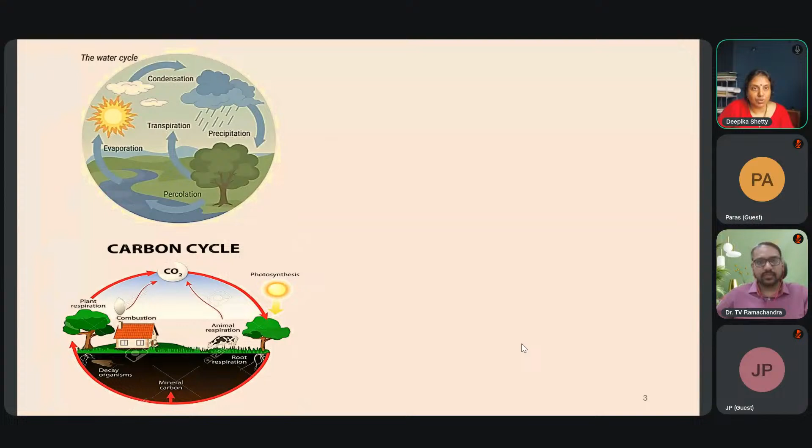Now, I think in built environment especially, these two nutrient cycles are very crucial, or we make a difference both in water cycle and carbon cycle. If we look at the issues we are facing in our urban or developed areas, it is the water management as well as the urban heat island effect. And these two cycles are the key for this cause or this effect.

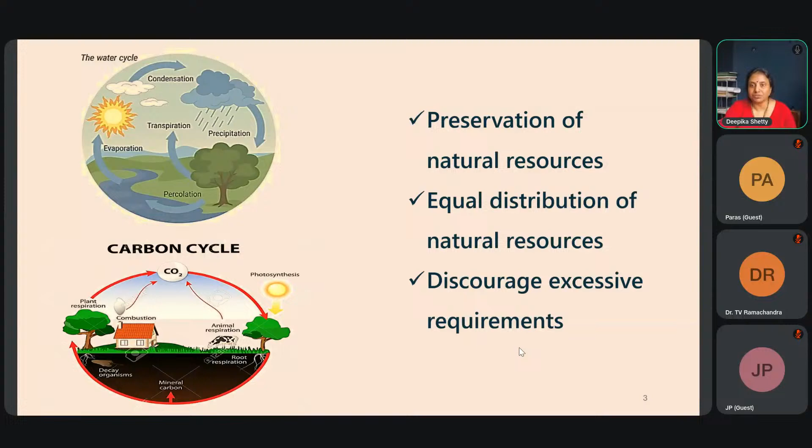So if we can be very conscious about these two cycles, I would say in built environment, the amount of green and water bodies in our design, as well as the percolation that we allow and how we manage the wastewater - these are key for the water cycle. In terms of carbon footprint, eco-friendly resources, as well as maintaining the green cover and radiated energy for the built environment. Equity in distribution is another issue - where do we contribute towards society and how much are we being greedy about managing the resources. So these are our design goals in terms of resource management.

So now whenever we say development, we should ask the question, what is it replacing? Normally the natural environment is being replaced. And then we ask what form would be best to replace the natural environment. Can we bring a system of development which is as close as possible to the natural ecosystem? May not be same, but at least similar. So understanding the existing natural system and bringing the designed or artificial form of habitat as close to it would be the second goal.

And the third goal is the impact. Now, when we make changes, there is an impact on the environment. How much can we replenish the impact of that development? These are the questions we should ask whenever we design.

Second is, whenever we design, where is the raw material coming from? How do we ensure food security? How do we ensure water security? And how do we ensure energy? Because for any habitat, the basic needs of man are food, water, and energy. If these three are not satisfied, we cannot call it a sustainable human habitat. So we should be building systems in the design which will manage these three well. And finally, that is for resource management.

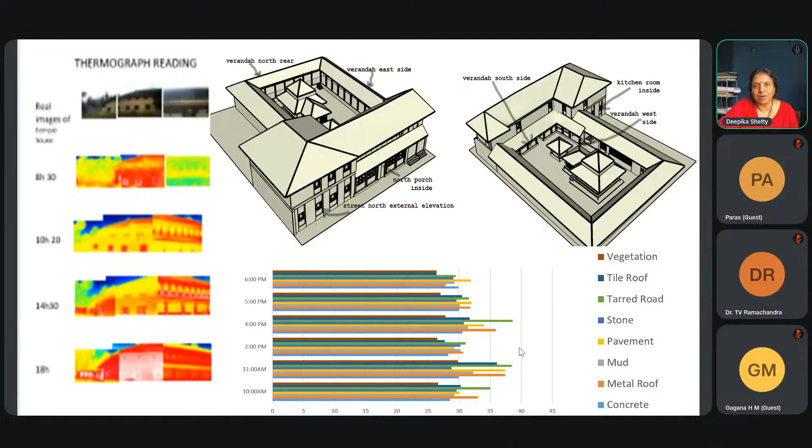Being in a tropical climate, this is very crucial for comfort and consumption of heat for comfort. And of course, there are other studies we did for wind circulation and all that, which I will get into later.

From these lessons, if I have to put some rules of building design, which I did with my second year BArch students, we do first profiling of the user and their patterns of use. In the patterns of use, we convert it into area requirements. Here the thumb rule is, if the activity can be done in an open space, we should allot that activity in the open space. Don't build when that activity can be done in open space.

For example, a basketball court can be in open space or enclosed. So if you are environment friendly, keep it in open space. A lot of congregation, community and recreational activities of meeting, even coffee or small time leisure activities, sitting and chatting can be in open space rather than built space. Instead of a cafe, coffee day shop for leisure, I would say make it a coffee shop along the open space and create that comfort which we need for those community activities.

So the first thumb rule is convert the requirement of activity as much as possible to open space. In a place like Manipal, where the heat and rain is very high, the semi-open space, that is only with columnar space and roof, would be the ideal space for habitat. In terms of creating comfort, the courtyard typology, the veranda typology, after open space, would be the space.

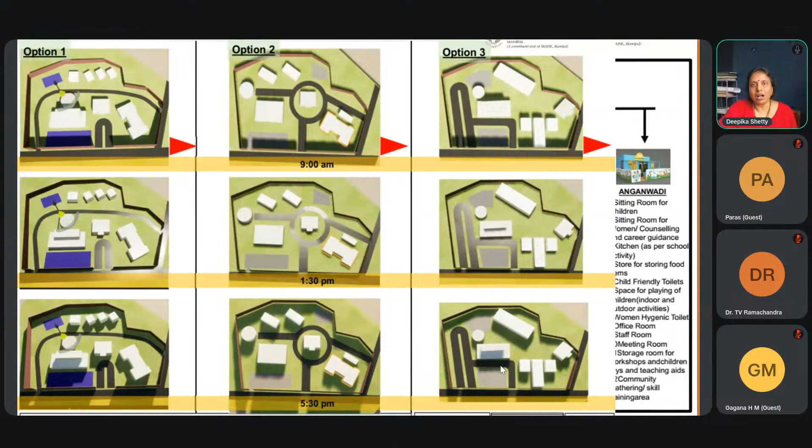Similarly, we stacked the buildings in such a way that we used minimum area of the site for built environment. We used the building footprint, or ground coverage for building, as less as possible, and rest of the area we left for natural systems like water management, waste management, and rainwater harvesting. Out of the options, we selected the one which is most efficient.

So if you see here, the amount of paved area was kept to just one round and not going all over the site. Similarly, the parking or the vehicular traffic was cut off in the beginning itself, so that the rest does not have too much paved area for parking and such things.

Similarly, the orientation of buildings and the open spaces were distributed in such a way that all these in-between spaces were usable spaces, including the courtyard and the shaded area for large-scale gathering. The Anganwadi play area again is open space with a secure environment.

The semi-open, open-air theater was in a place where the building gave shade in morning and evening hours. The courtyard allows the people to have recreational activity in the office with security and comfort even in afternoon time, so they can have their break time or lunch time over there.

So we created the cafeteria as a colonnaded open space as much as possible. The building is not enclosed, which allows it to have maximum ventilation.

And we created an area for the management of water and rainwater in such a way that the whole year's requirement of potable drinking water is managed with either rainwater during rainy season or stored rainwater during the off-rainy season. We had the recharge well, where excess water goes into groundwater recharge, which keeps our water security for the whole area.

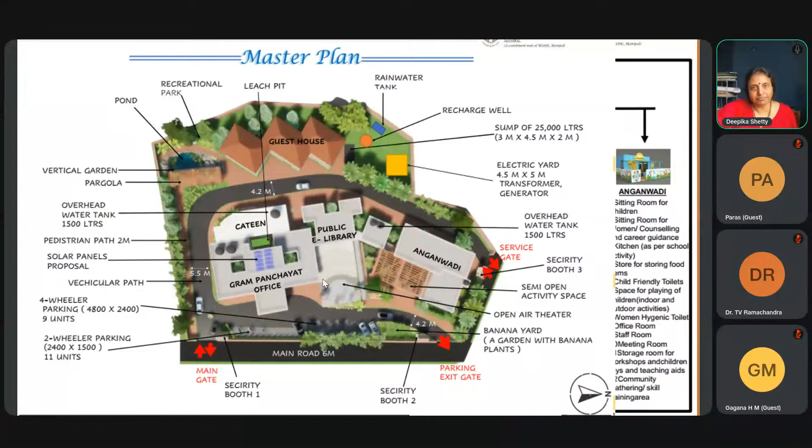Now, after this, we made sure that all the built material was such that it would reduce the carbon footprint, both from the type of sourcing it, so that it is locally sourced, as well as the ecological footprint. It is as less processed or artificial as possible.

The third criteria was to see that the radiated heat is less, so it allows percolation of water, like paved material or open pavers, or porous material which allows water percolation, as well as the energy footprint is very low in terms of radiated heat and transmitted heat. In walls we call it U value, and for paved areas we look at the porosity. All this was taken care of when we selected material for the built environment.

Just to give you an idea, after all these measures, when we look at a typical office building in an urban area, the energy per unit area per day comes to almost 2,500 to 4,500 kilocalories, depending on the type of equipment. A good efficient building today, what we call a green building, uses up to 1,500, or 500 to 1,000 kilocalories per square meter per day.

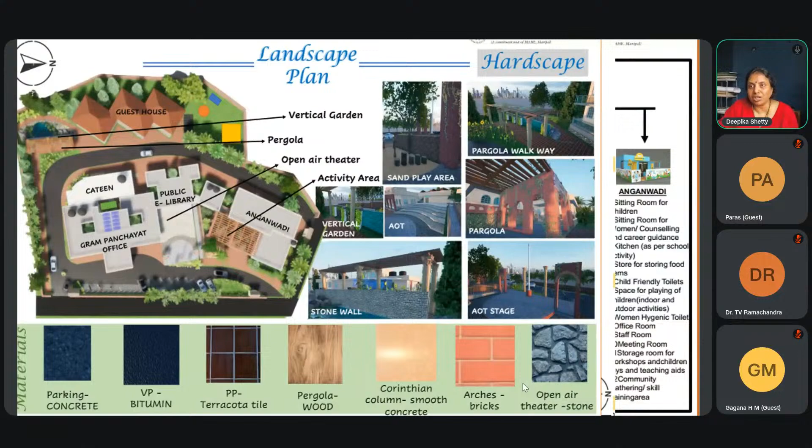However, when we look at this kind of design, where the amount of building coverage itself is reduced, we are bringing it down to 100 kilocalories per square meter per day. So the saving is exponential, which we don't even realize when we do these measures in the built environment.

Similarly, every material is sandwiched with some air gap, both in the roof where maximum radiation takes place, and we use material which will reflect heat rather than absorb heat. So each gesture of this kind can reduce the temperature inside by up to 10 degrees centigrade.

Also, the reflected heat, like glass and metal, reflects heat. So the area of glass and exposure to reflective materials like metal is reduced to a large extent, so that the surrounding environment and open space also don't get heated. So all these systems were used, along with clay tiles. The aesthetic can be as modern, the equipment can be as modern, but these systems really make a difference in your energy consumption for comfort in the indoor environment, as well as comfort in the outdoor environment.

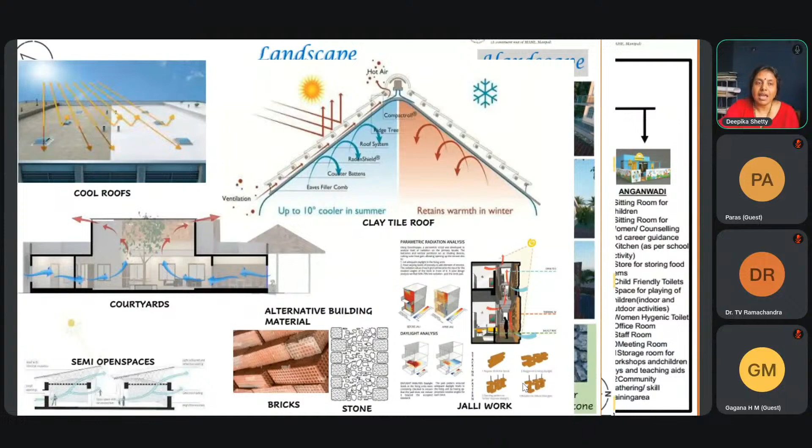So after all this, we go into the role of water bodies, how important it is to have water bodies in your building area or the built environment. They perform so many basic roles for us in a habitat, and this is not naturally occurring, it should be man-made. I would say every cluster of housing, every institution, every big township development should take care of one or more water bodies. They help in microclimate moderation, groundwater recharge, flood prevention, stormwater control, ecosystem services in terms of natural ecosystems, and irrigation and recreational activities.

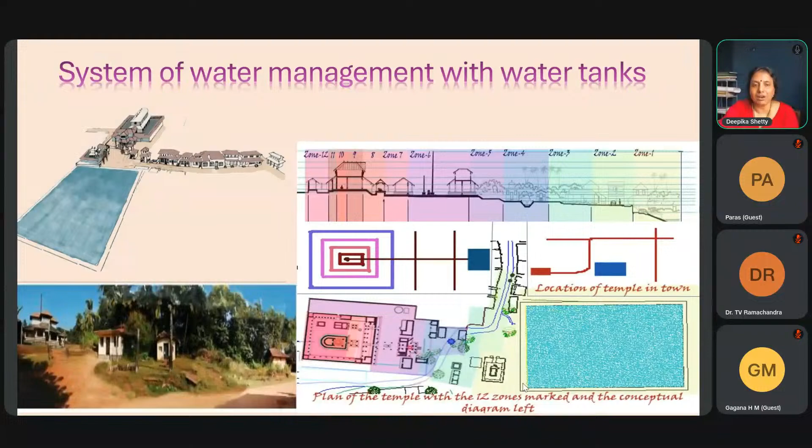So when we look at our traditional systems, like in Barkur, every neighborhood of 50 to 100 houses would have one tank in the lowermost position linked to a temple, which maintains its cleanliness. The area of the temple is much smaller than the area of the tank, and the tank is lined with stone so it maintains its boundary and people don't encroach on it. At the same time, it is highly vegetated - stone open pavers allow the soil to be used by plants and vegetation. This is not used for any human activity like bathing or washing, because every house and property has a well. So this tank acts as a recharge pit for groundwater, and consumption is through the well. This was a very good system which can be used even in modern times.

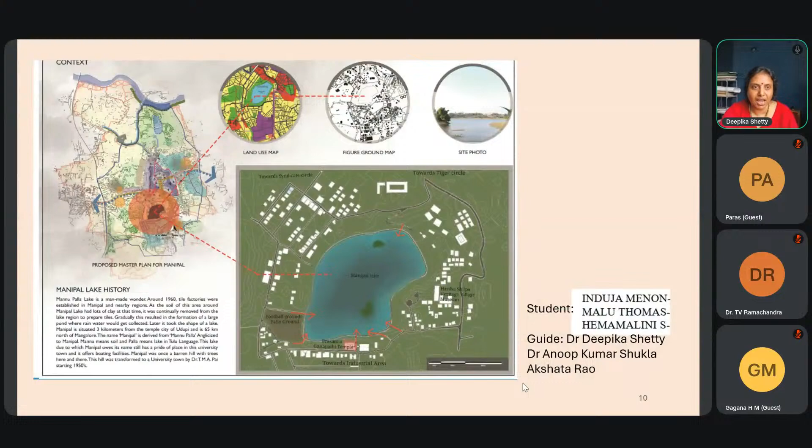The case we took here is of Manipal Lake, where there was a quarry or clay extraction site for clay tiles, and that became a pit. It was scooped out again for management of water. It was in a low-lying area, and finally today it has managed groundwater recharge of more than 10 lakh liters, enough for a neighborhood of Manipal or high intensity development.

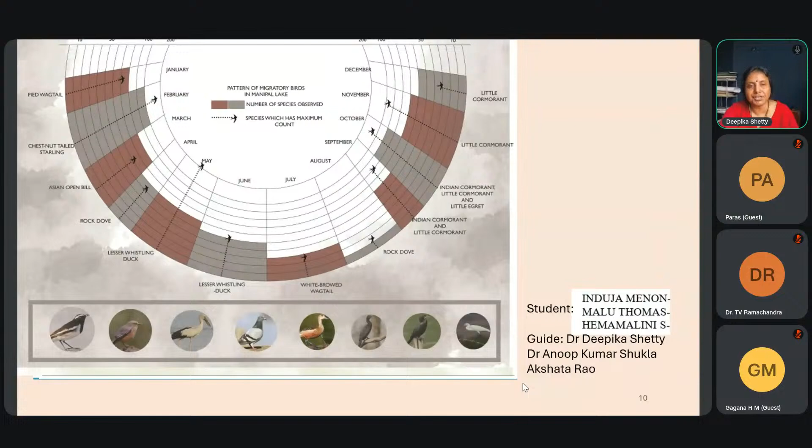It also supports more than 200 species of birds and a lot of biodiversity. So we mentioned that if we give 40 to 50% of the lake edge for natural habitat, we ensure that the habitat for birds and species in and around the lake is maintained, and the rest of the area is for human consumption such as walking and recreational activities, along with natural features, making sure the vegetation is of native type and manages the soil and stability of that environment. We identified the species which would be beneficial around the lake, and the activities which could be designed along with the greenery, making sure that 40 to 50% of the lake was not disturbed by human activity and was left for nature. In fact, the rest of the human activity would watch nature and enjoy it.

So this kind of space is required in our human habitat or dense urban active areas, so that we still enjoy nature and create some place for animals and other species too.

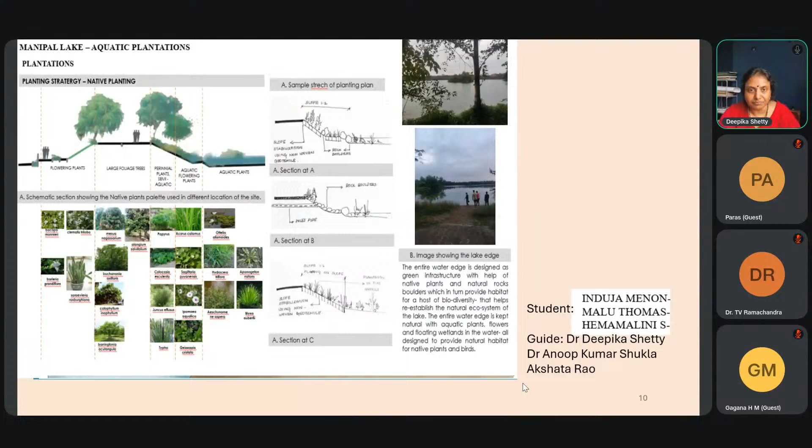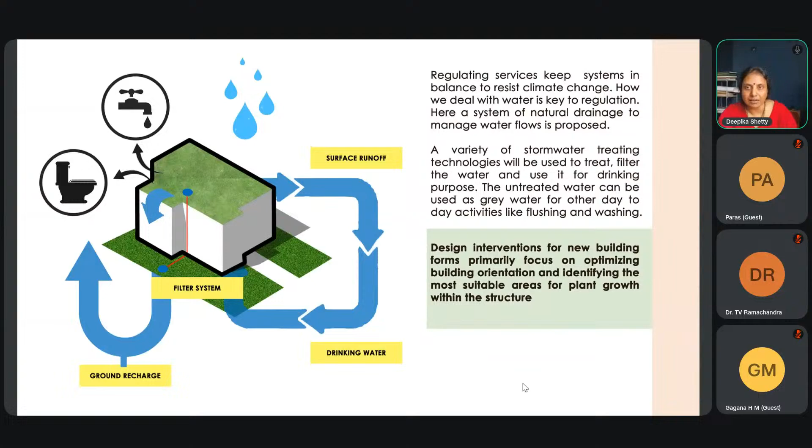So next, when we have an apartment block, can we increase the amount of greenery and manage surface runoff as much as possible, so that we have water security as well as reduce the heat island effect? The simple measures we take are using fittings which consume less water, and making sure that as much as possible the roof and surrounding area have green cover - the higher the amount of foliage, more height, more leaves, the better the cooling effect and ecological services. With this thumb rule, we looked at building forms which will allow even vertical surfaces to have greenery, no matter how high they go. We created typologies of forms which allow greenery, and looked at systems where it could be managed as common space, like near staircases and terraces, with maintenance handled as common maintenance rather than individual, since many people say they don't want to maintain greenery because they don't have the time or money to manage it.

As a society, as a group of individuals, we can always maintain open green spaces in a built area. So all our common spaces like staircases, terraces, and duct areas could have greenery and be maintained through common services, given drip irrigation and wastewater management through those services. So that was the second step.

Third step we did was, whatever area we could, we gave it for water and green space in the neighborhood. So after the cluster of buildings were designed as per the requirement, the roof and other surfaces and management of water was given for green area.

And there's this concept of mixed use. So near the habitat, we gave types of plants, smaller creepers, bushes which can be consumed, like vegetables, fruits, creepers, or micro herbs, so that people consume it and they will maintain it because it is giving them some value.

And away, at the larger scale, we gave more importance to larger trees and foliage, which will increase the ecological services and groundwater recharge. So we created a format where people will feel benefited from these measures, both in short-term and long-term basis.

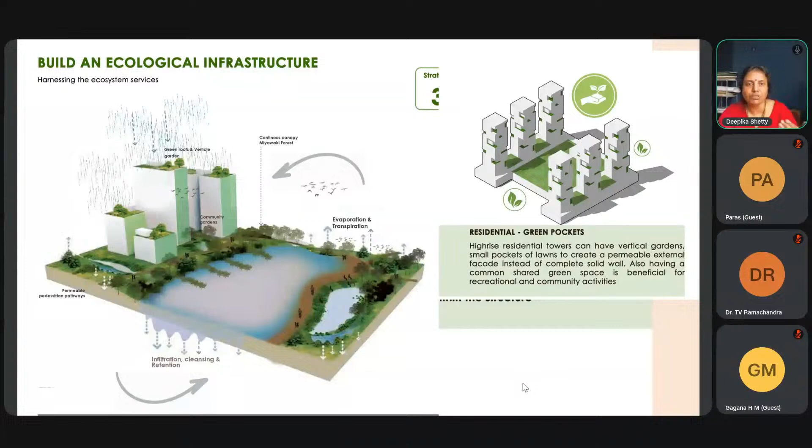And similarly, we had this mixed community farming in the public domain, like streets or common spaces, which would allow reducing the urban heat island effect, as well as increase food security and water management. So we said, can it be community farming combined with fruit trees and community vegetable growing?

And also create a habitat where we are used to using the open space for community, like children's play area, meeting area, interaction area, and group activity area. So this was another vision for a larger scale.

This would also mean that we get exposure to nature and create habitat within the built environment where other species are there, where we see butterflies, we see birds. Today we don't hear chirping of birds in all our built environment. Many places sound dead, they look dead, because there is no other species. So we create habitats and we become part of nature in these areas.

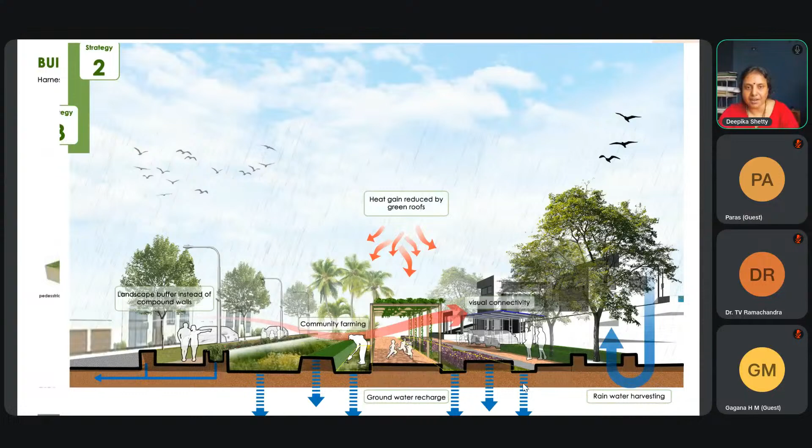Now, even if we look at our traditional scriptures, they have given a lot of importance to certain types of trees like banyan and other ficus trees like peepal. I went into the technical details and realized that these ficus trees have maximum ecological services. Again, thanks to Sir, that I learned these kinds of terms and concepts.

And we realized that within 5 years, the banyan can start giving its benefit. For 4 years you have to maintain it, see that it grows properly. And the propagation of it is through seed, but it's very difficult, preferably grafting, or if there is an existing peepal or banyan tree, I would say maintain it or protect it, because natural propagation has almost stopped due to man-made problems.

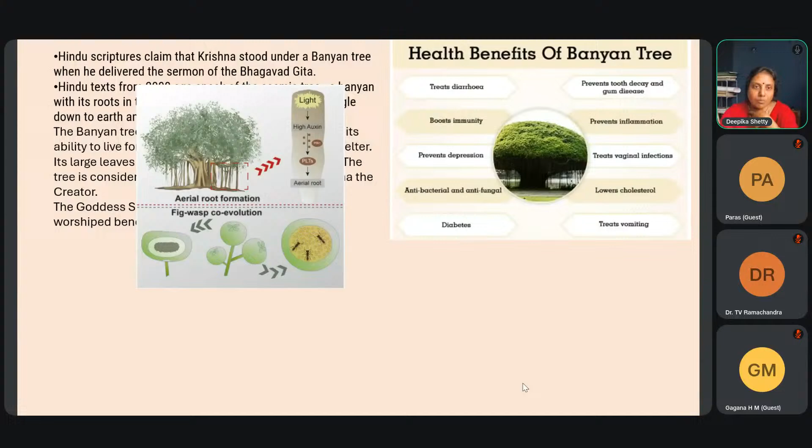The wasp, which was required to pollinate it, is almost extinct. So natural propagation of banyan is almost stopped, and the survival rate in the human habitat for banyan is very low, because we have not given enough space for banyan to grow.

However, one of the things we can do is grafting. Even when a banyan tree is removed, we can create another space for it and see that it is preserved, because per square meter of foliage, it gives maximum benefits to us in terms of medicinal values,

reducing the urban heat island effect, disaster management in terms of preventing landslides, soil erosion, and improved water percolation, reduction of runoff, reduction of flood, reduction even in terms of cyclone - if a tsunami or cyclone lashes against a banyan tree, the force is reduced and hence the built environment is protected. So these are kind of shields you can create in your human habitat against disaster, as well as providing ecological services.

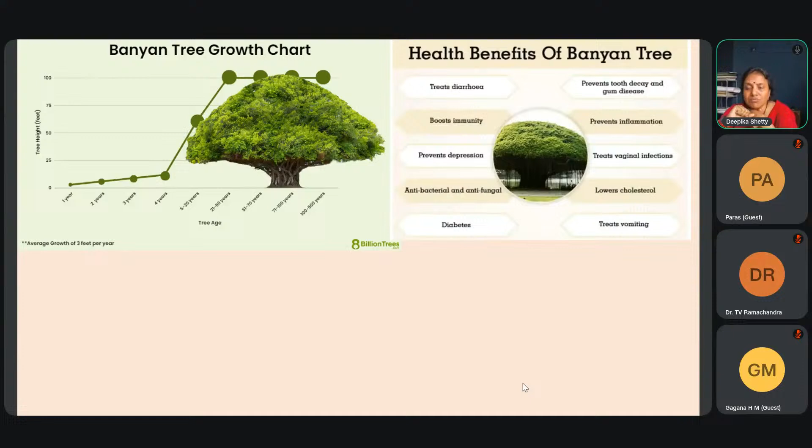So if we look at the benefit in numbers, just to give you a clue: just a 7 feet diameter small banyan tree can give you 12 pounds of oxygen - 6 people can breathe for an entire day on that oxygen. It stores 4 pounds of carbon, which is equal to 71 feet of travel in a commercial plane. And 119 gallons of water gets evaporated and percolated, so the cooling effect of a banyan tree is almost equivalent to 5 air conditioners working for 20 hours.

Every time you plant a tree, this is the saving you do in terms of energy and benefits in the microclimate, and of course reduction in your carbon footprint. A little grown banyan tree, from 7 inches to 19 inches, has exponential benefit: 5 tons of oxygen, which allows 5,801 people to breathe fresh air every day.

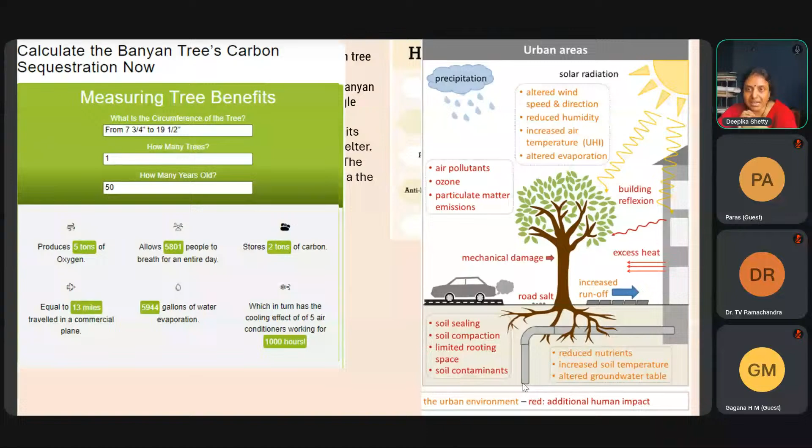So nowadays we calculate tree cover instead of green cover in urban areas, so that ecological services are captured more efficiently, rather than saying any green open space is fine. No, it should be tree cover in built environment, which counters all these measures or problems of urban areas.

So finally, I've summarized our normal day-to-day requirements in the built environment and how we can build more sustainably. It's not a diagram, not a singular solution, but more of a sensitive, analyzed, intelligently selected set of decisions about how we want to live, what we want to consume, and how we can make sure that our environment is sustainable or comfortable, and in the long term beneficial for our health and well-being.